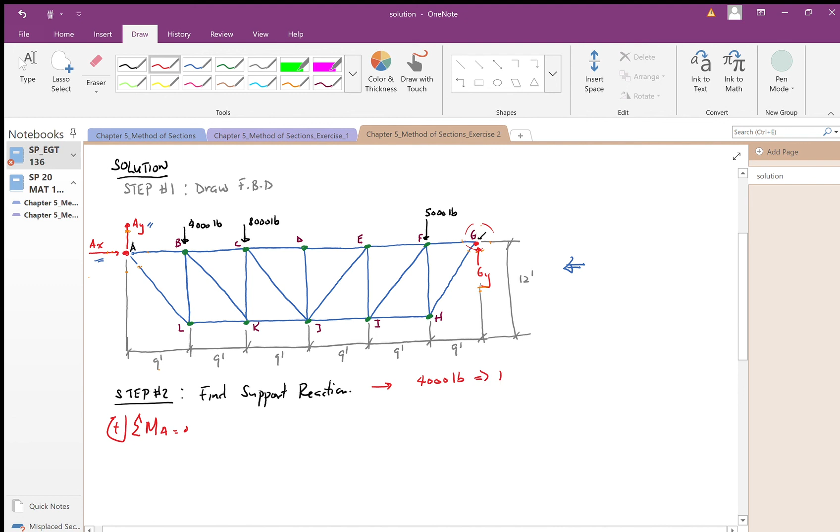And again, I'm just going to abbreviate rather than saying 4,000 pounds or write it all the time. I'm just going to say 4 kips, which means kilo pounds, or I may write it as 4K, which also means kips, just abbreviated. Okay, so I'm dealing with this section right here. This is my point of interest.

So that's going to be 4K times 9 feet plus 8K times 18 feet plus 5K times 45 feet minus GY times 54 feet equals 0. Again, I'm starting from my point A here, and I'm moving from left to right. So the first force I see is 4,000, and that is 9 feet away from my point of interest A. It's going to give it a positive moment. That's why I have a positive sign here.

Then the next force I come to, as I move from left to right, is 8,000 pounds, and that happens to be 18 feet away from point A. It's going to give me a positive moment. The next force I come in contact with is at point F, and that's 5,000 pounds, and that's going to be 45 feet away from point A, and that's going to give me a positive moment.

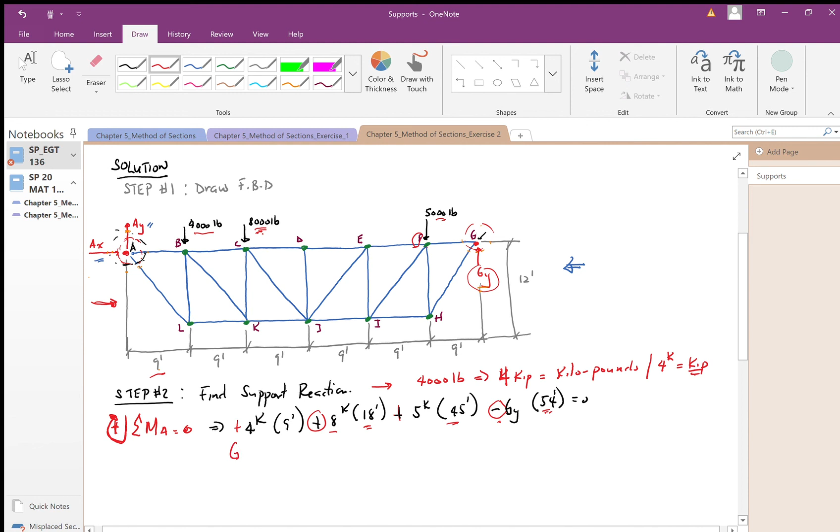And then my GY happens to be 54 feet away from point A, and that's going to give me a negative moment. I've told you in the beginning that I'm taking my moment clockwise to be positive. So anything other than that will be a negative. When I solve for GY, I'm going to get 7.5 kips. Okay.

Now I can do my next equilibrium equation. I'm just going to use sum of the forces in the x direction equals 0. I'm going to take from left to right to be positive, and the only force here in the x direction is AX, and that's going to be 0. Okay, AX equals 0. Now I can do sum of the forces in the y direction equals 0.

Oops, I'm sorry, this was absolutely wrong here. This is X. This looks like this, and this looks like this. I'm deeply sorry.

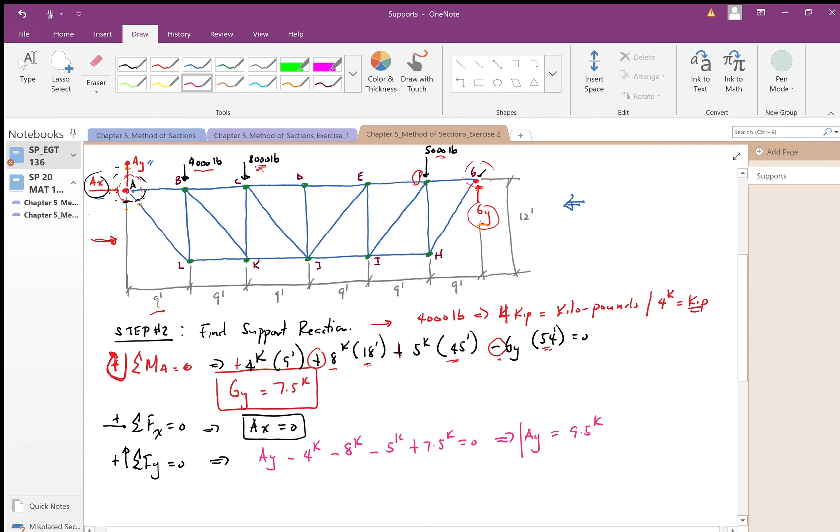Okay, so I'm looking at all the forces in the y direction. I have AY pointing up, and then my 4,000 is pointing down, my 8,000 is pointing down, my 5,000 pounds is pointing down, and then my GY that I just found is pointing up, and that's going to be 7.5 kips, equals 0. When I solve for AY, I'm going to get 9.5 kips. Okay. Now, I found my support reactions.

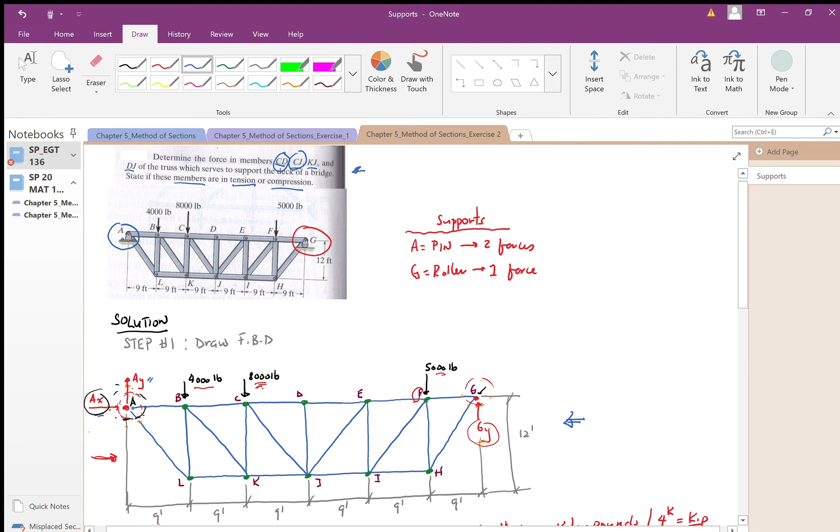My next step, step number 3, is I want to create a sectional cut at members, what's that going to be? CD, CJ, KJ, and DJ. So when I do that, you're going to see a sectional cut right here that's already been created.

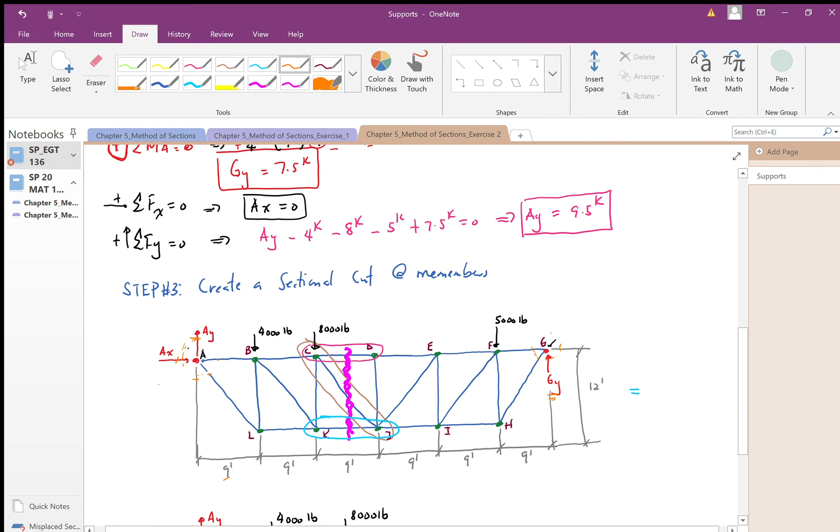Because all I'm interested in is this member, CD. I'm interested in this member right here, CJ. I'm interested in this member here, KJ. And I'm also interested in the member, let me use this one, DJ. Those 4 members. So when I do that, I'm just going to create a cut, which I've done. So that cut was like this. And I'm just going to remove that for now.

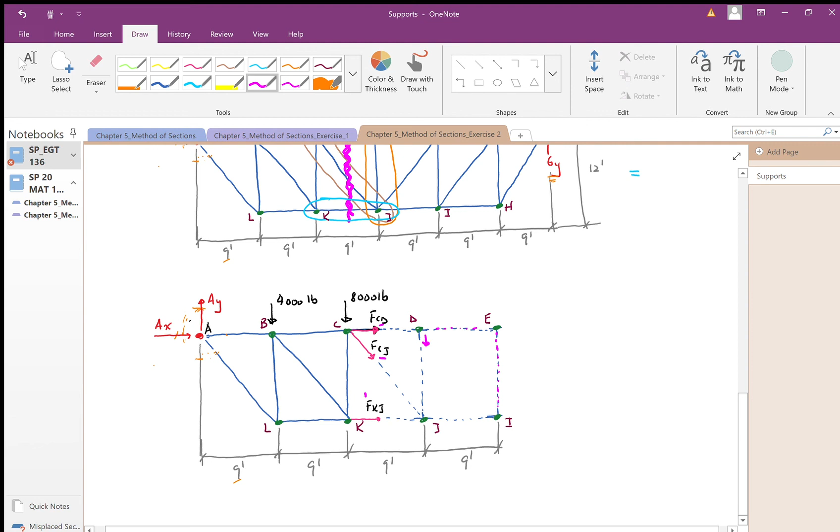What's in the dashed components is just an extension of that particular frame. So I'm showing a section cut of all the forces. So I need this one, KJ, CJ, CD, and I need this particular force right here, DJ. So we can move forward. I want to use my equilibrium equation, sum of the moments about point C equals 0.

This is my point of interest right here, C, and I'm taking the moments about that point. And when I do that, I'm going to get FCD. I'm sorry. That's incorrect. I can't use force CD, right? Because it's going through that point. So I have to use my force KJ. Okay, so let me do that. Oops, sorry.

FKJ, right? So my FKJ, that's going to give me a negative, right? Point of C. This is my point of interest here. And this is 12 feet, 12 feet away. Okay, so that's going to be 12 feet. Okay, and now what other force? I'm at 4,000, 9 feet away from my point of C. So that's going to be -4, and that's going to give me a negative moment, 9 feet.

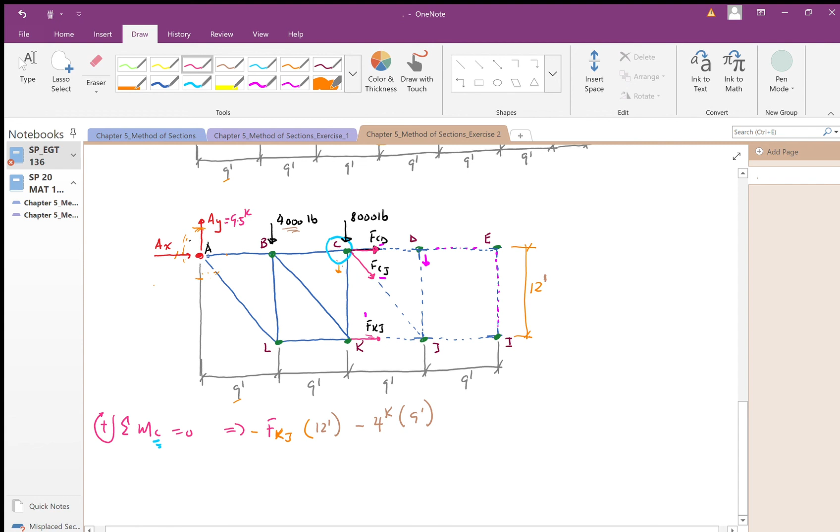And I have 9.5. Now my AY was 9.5 kips. We found that for my support reaction. Okay, so that's going to be 18 feet away. It's going to give us a positive moment equals 0. Okay, so I solve for FKJ. That's going to give me 11.2 kips. Okay, and that's going to be in tension.

Okay, now if I take it a step further and say sum of the moments about point J equals 0. Now this is my point of interest right here. Now, I look at FCD, for CD, and from point J that is going to be 12 feet away, right? So that's going to give me a positive FCD 12 feet away. Minus the next force, as I'm looking to my left, I see 8 kips, and that is going to be 9 feet away from point J, and it's going to give me a negative moment, okay?

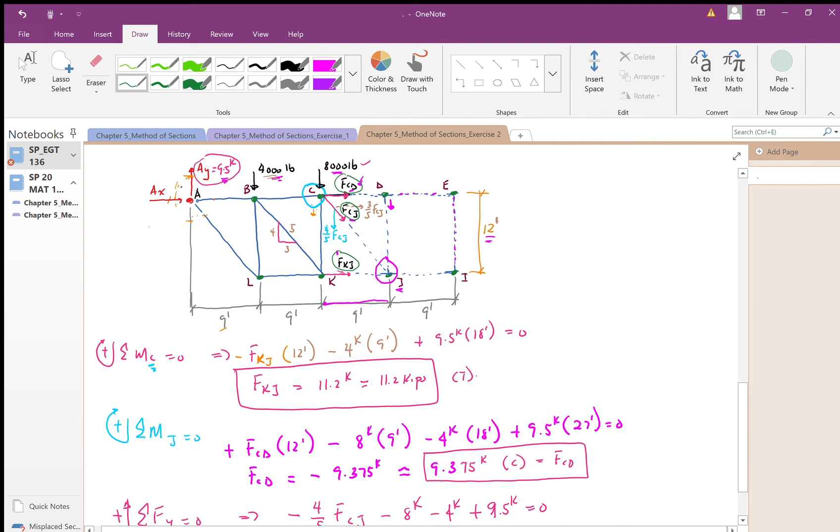And now if I do the math, I could take this to the other side of the equation: negative 8 kips minus 4 kips plus 9.5 kips equals 4/5 FCJ. And then FCJ is going to be 3.125 kips, and it's going to be in compression. Okay. Now, the last one I need to do. So far we found KJ, we found CJ, and we found CD. We need to find this member right here, DJ.

Okay, so what we can do is look at joint D. So this is joint D. Here's going to be force DE, force CD, and this is force DJ. So if you use sum of the forces in the y direction equals 0, our force DJ happens to be 0. Okay, so this is your answer.

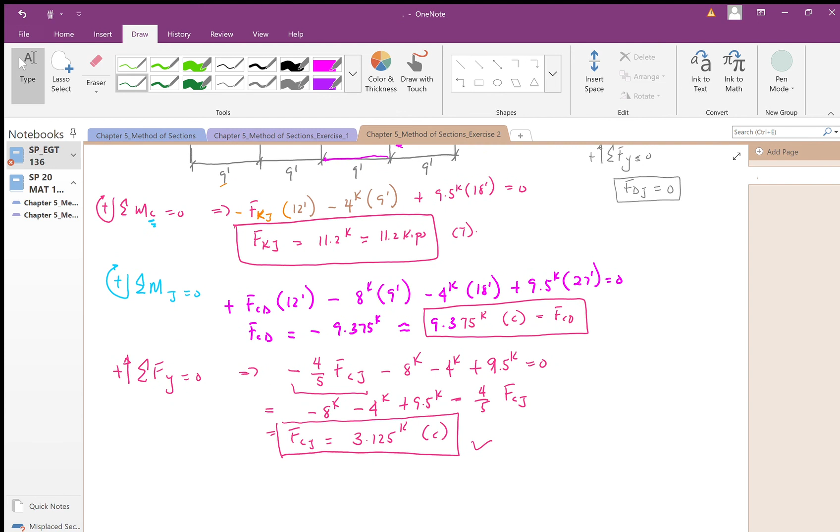Okay, oops, I'm sorry. I'm trying to make these videos as short as possible. So forgive me if I'm rushing a little bit. Just don't want it to be so long. But there's some concepts I just need to explain, and hopefully everyone gets this.

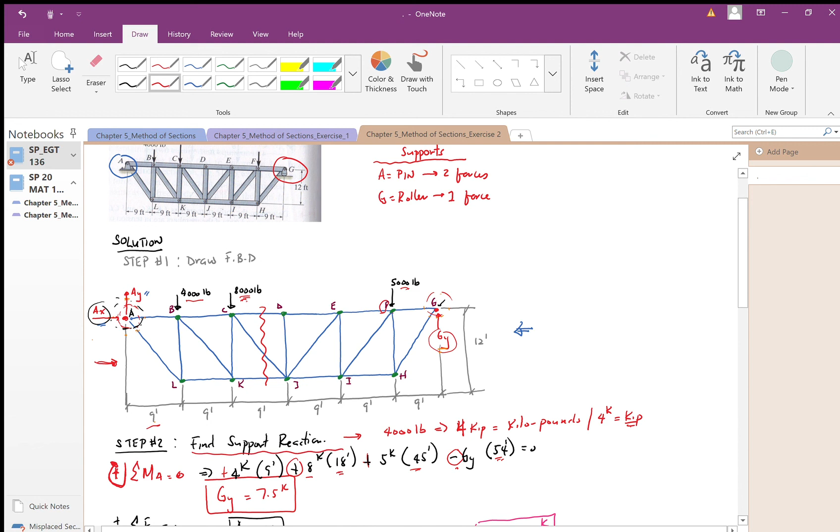So again, the takeaway is we are just trying to analyze certain members of this particular truss, and we need to analyze only 4 members. So the idea is, why don't we just use a sectional cut rather than the method of joints? Before you take a sectional cut, you first want to calculate your support reactions. Once you do that, you take a sectional cut of the area you're interested in, and redraw it as another free body diagram, and just keep the side you want.

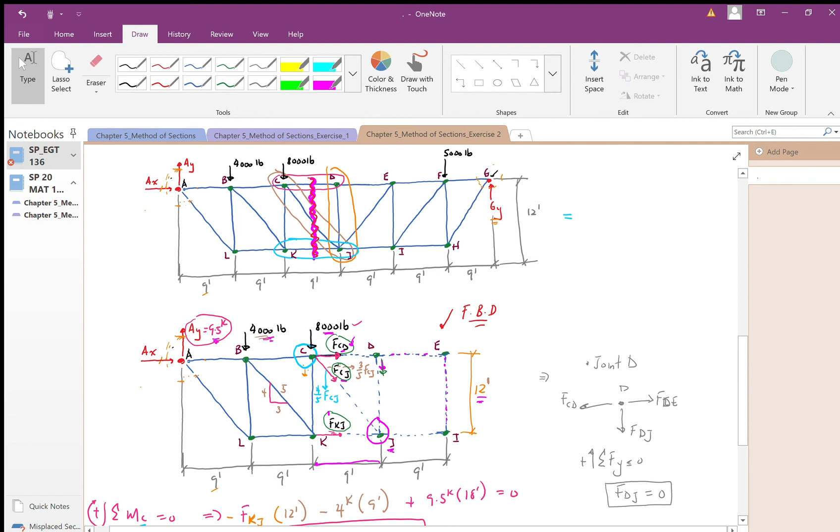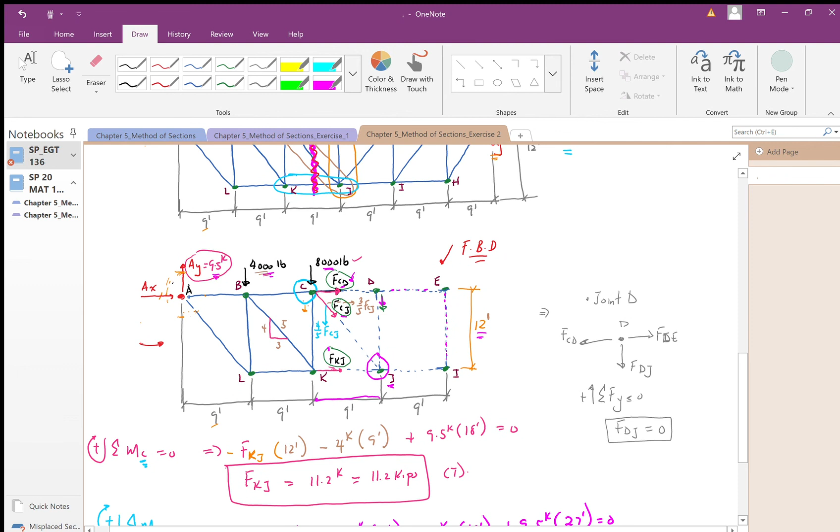I could have come from the right side, but I just chose to keep the left side. It's up to you. And then from there, you just evaluate using the principles you know from the method of joints, and find the forces in the members you are interested in. Okay, I hope this helps.